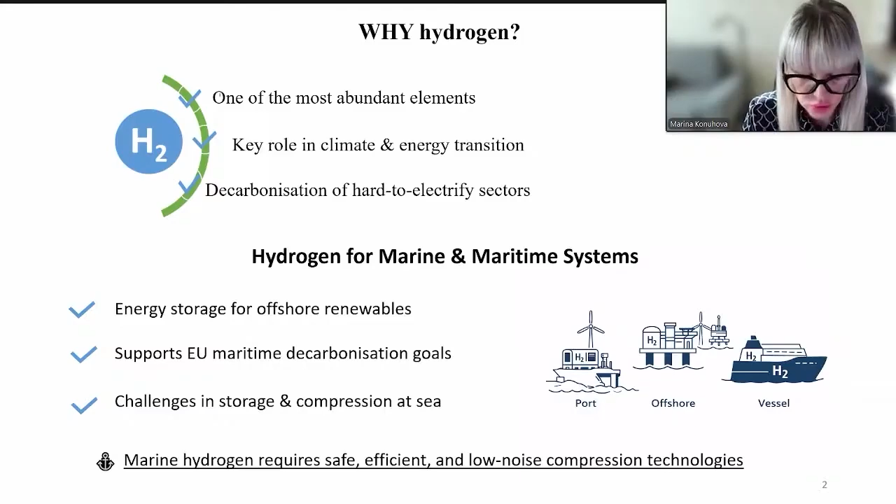On this picture, you can see a typical hydrogen compression infrastructure from production to high pressure storage. Hydrogen can either be delivered to the site or produced locally using electrolysis, often powered by renewable energy sources such as wind or solar. In this case, we usually refer to green hydrogen, which does not produce CO2 during production.

After production, hydrogen needs to be compressed from low or medium pressures to the high pressure levels required for storage and distribution. This compression stage is a key part of the overall infrastructure. In marine and maritime systems, the same concept applies, but additional requirements appear: equipment needs to be compact, reliable, and suitable for offshore conditions.

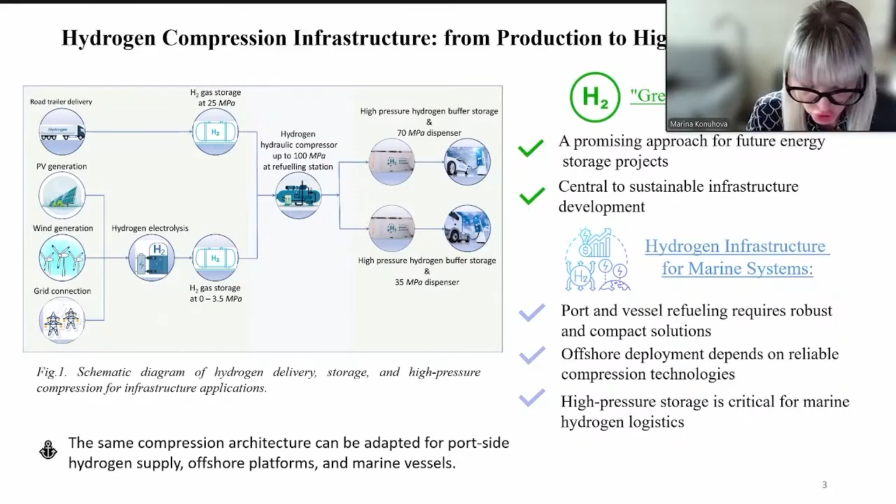This slide shows the concept of a hydraulic hydrogen compression system based on the liquid piston principle. This compression concept has been developed by our research group at Ventspils University of Applied Sciences and is protected by several national and European patents. In this system, hydrogen is compressed in several stages using a hydraulic working fluid. In our case, it is silicone oil, which acts as a liquid piston.

The use of liquid piston allows smooth and well-controlled compression. The system includes primary and secondary compression stages, high pressure storage, and a set of valves that control both gas and fluid flow. One of the main advantages of this approach is a relatively small number of moving parts, as well as low noise levels and improved thermal management.

In general, this system can reach pressures of up to 100 megapascals, making it suitable for port infrastructure and offshore platforms.

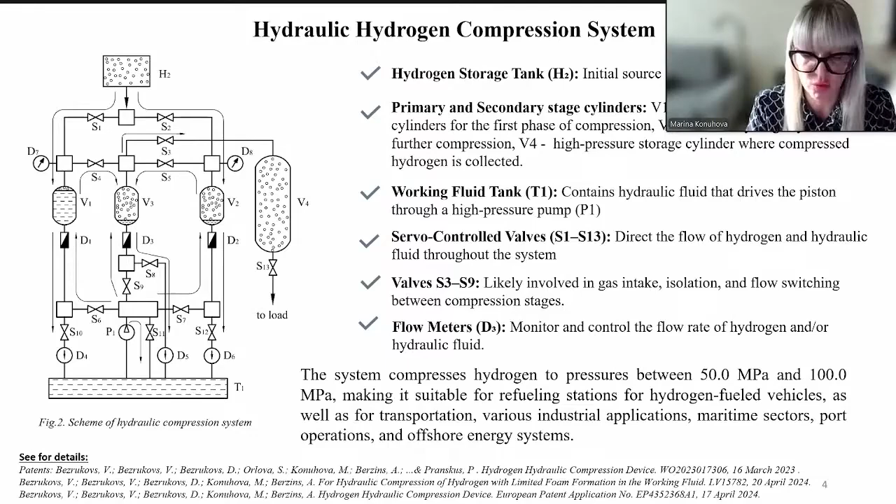This slide summarizes conventional mechanical hydrogen compression technologies such as reciprocating piston, linear, and diaphragm compressors. All these technologies are well established and widely used in stationary and automotive applications. They can achieve high compression pressures and have proven performance.

However, when we move to marine and offshore environments, some of their limitations become more pronounced. Mechanical compressors typically involve many moving parts, which leads to higher maintenance requirements as well as increased vibration and noise. As a result, conventional mechanical compressors are not always the optimal solution for marine hydrogen infrastructure. This motivates the search for alternative compression concepts that can offer a simpler design.

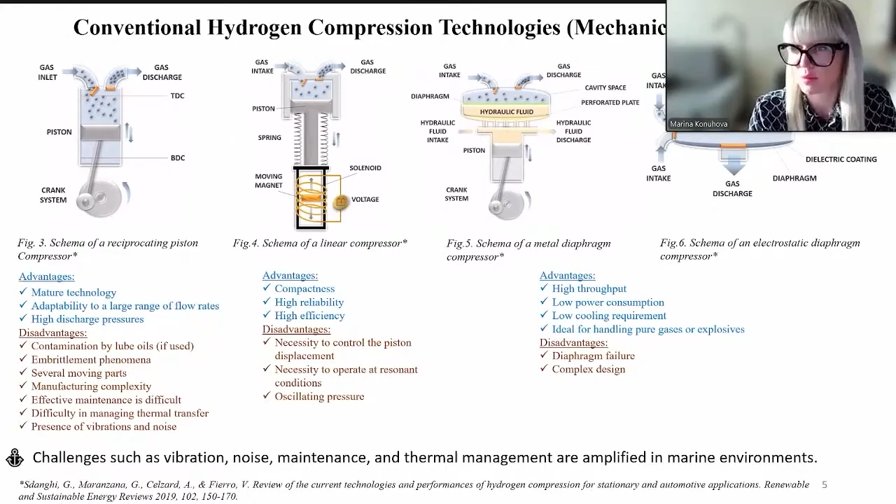Here you can see the alternative solution. In this liquid piston approach, hydrogen is compressed by a liquid column that acts as a piston inside a fixed volume chamber. This allows the compression process to be smooth and well controlled, while avoiding many of the mechanical issues found in conventional compressors. An important feature of the liquid piston is its thermal behavior.

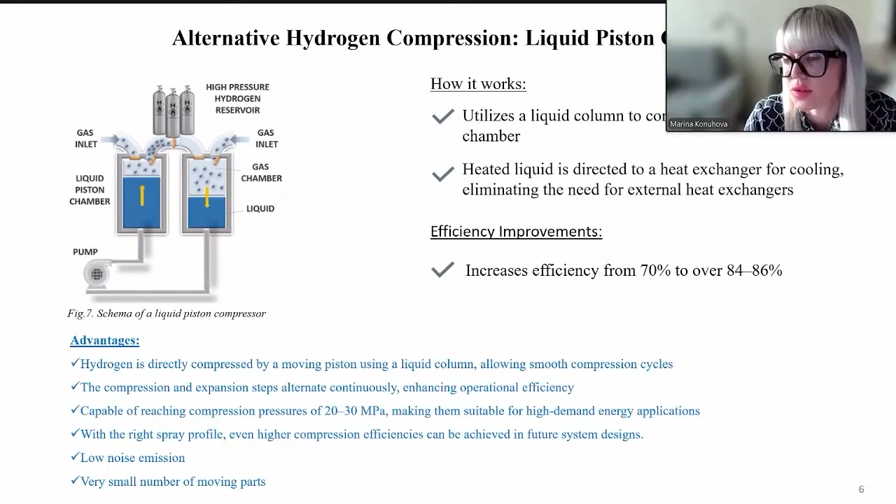The liquid absorbs heat generated during the compression and can be cooled more effectively. As a result, the overall compression efficiency can increase from a typical value of 70% to over 85%.

To better understand how hydrogen behaves during the compression process, we use a numerical model. This allows us to study how pressure and temperature change during compression and to design a safer and more efficient system. One of the main advantages of simulation is that different operating conditions can be tested without physical experiments. We can change compression speed, the geometry of the chamber, or the working fluid, which saves time and cost and helps improve system performance.

Here you can see the model. It has a height of 145 millimeters and a diameter of 100 millimeters, with a total volume of a little more than 1 liter. Hydrogen is located in the upper part of the chamber, while oil acts as the working fluid below. As the oil rises, the hydrogen is compressed.

The simulation includes heat transfer between the hydrogen, the oil, the chamber walls, and the surrounding environment. This multiphysics approach allows us to analyze temperature variation, heat losses, and pressure development during the compression cycle.

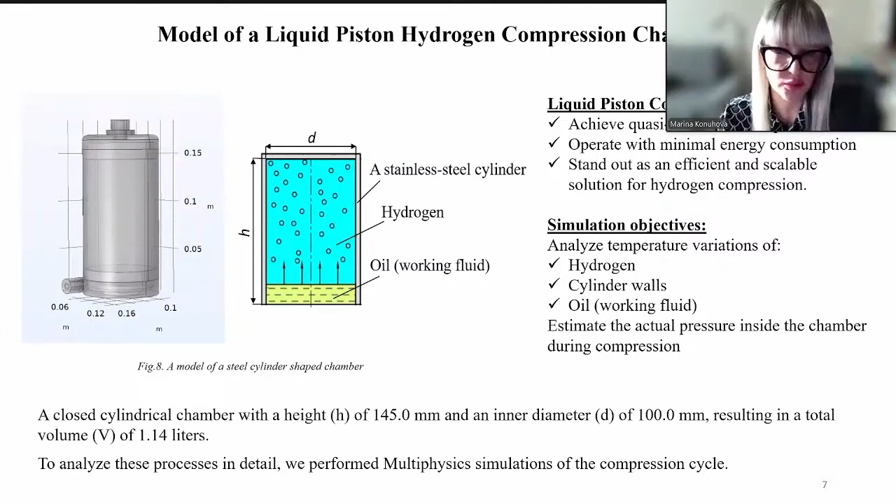Here you can see the liquid piston compression chamber implemented in COMSOL software. We used a multiphysics approach that combines compressible gas flow for hydrogen, incompressible flow for the liquid piston, and steady heat transfer. The model includes all main parts of the system: the hydrogen region, the liquid piston, and the steel chamber walls. During compression, the gas and liquid are compressed together, and heat transfer between the hydrogen working fluid and the chamber is taken into account. This allows us to analyze how pressure and temperature change during the compression cycle.

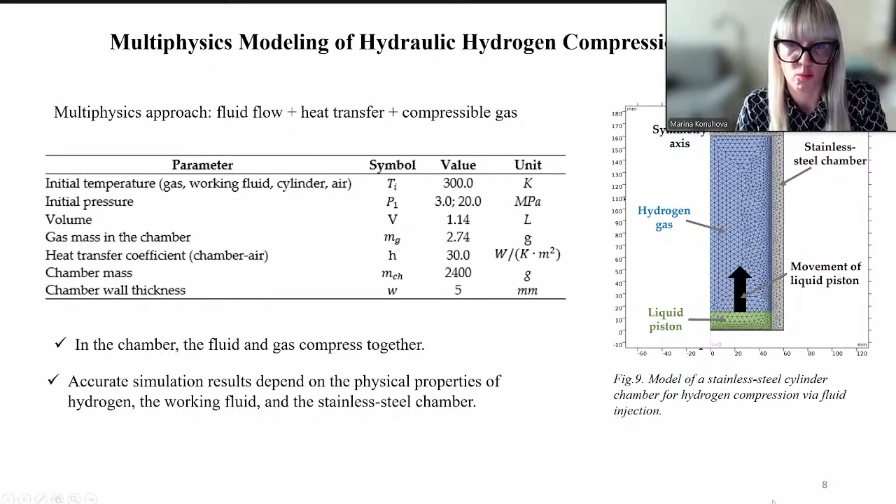In COMSOL, implementation begins with model parameterization. All key parameters are defined in the global definitions section. This includes key geometric values such as piston stroke, cross-section area, and compression chamber height, as well as initial conditions. Defining these values as global parameters means the same values are used consistently throughout the model in geometry, physical interfaces, and study settings.

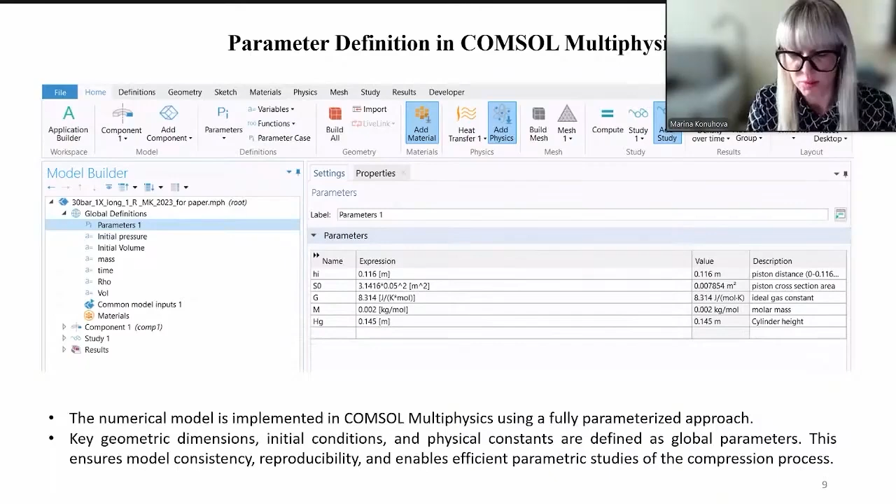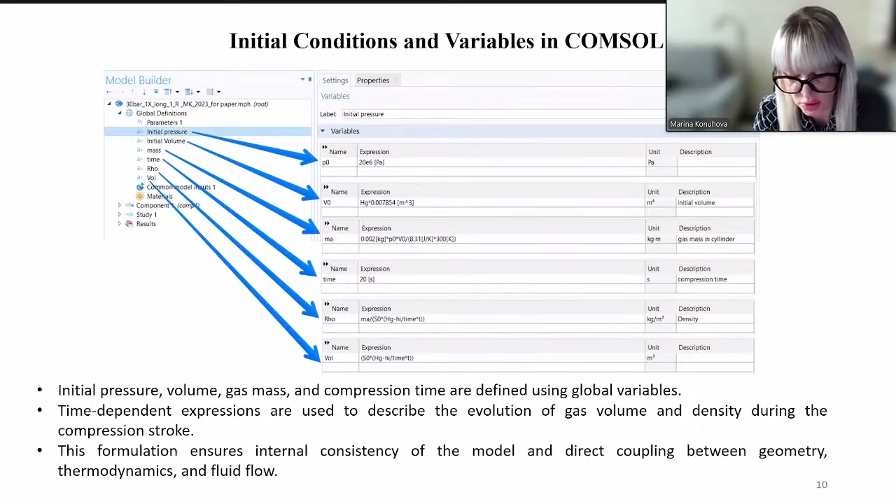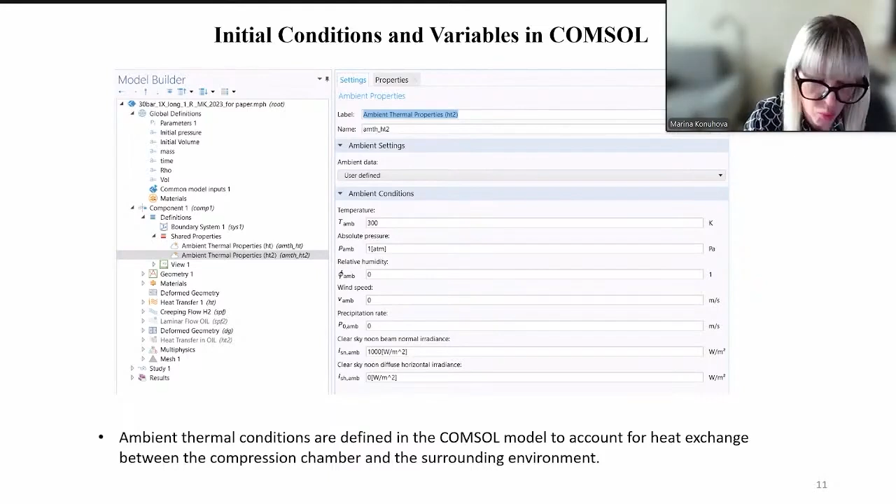In the next step, we determine environmental conditions, such as temperature and pressure. This allows us to account for heat exchange between the chamber walls and the surrounding environment, so the model can include realistic heat losses, which is important when analyzing temperature change during a hydrogen compression process.

Besides building the model directly in COMSOL software, the geometry can also be imported, for example, from SolidWorks.

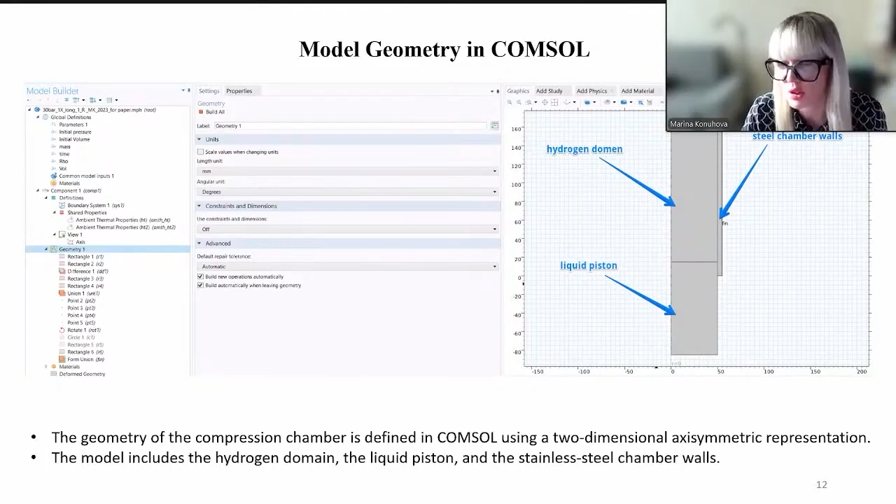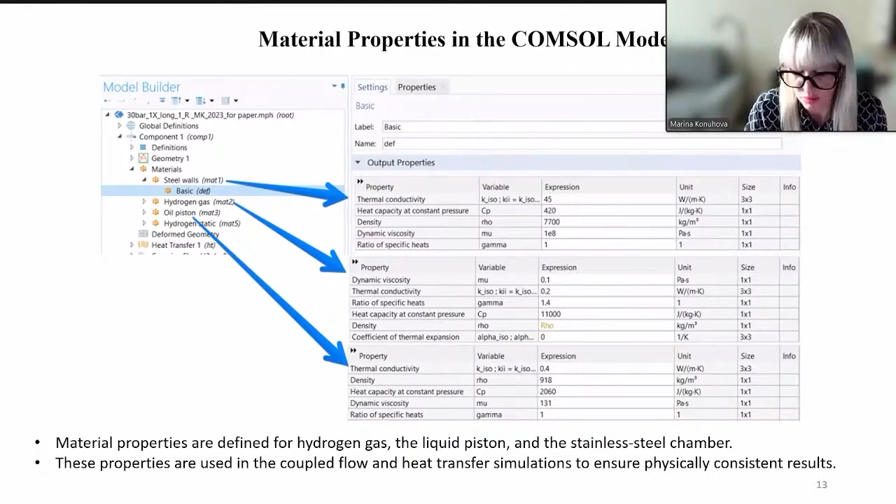You can use materials already available in COMSOL software, or it's also possible to enter them manually.

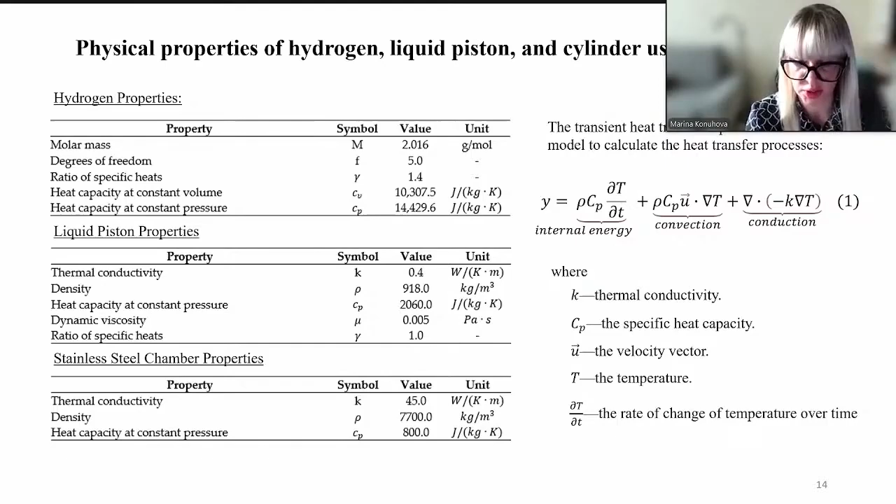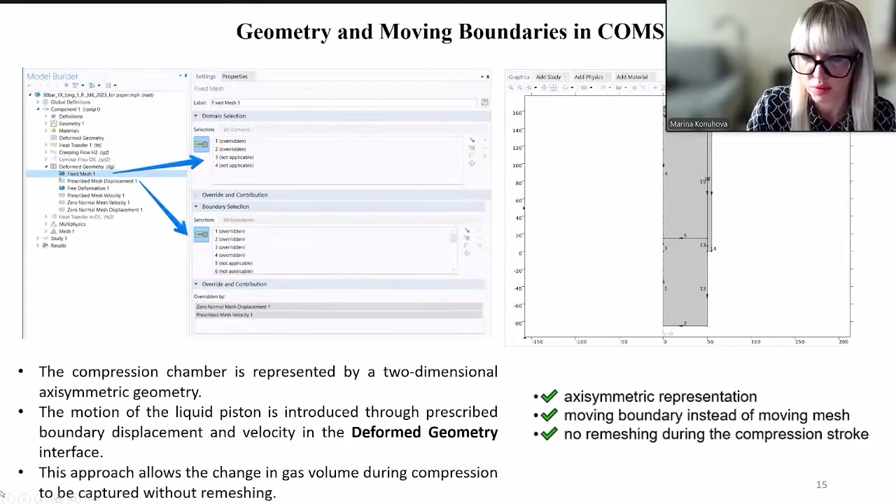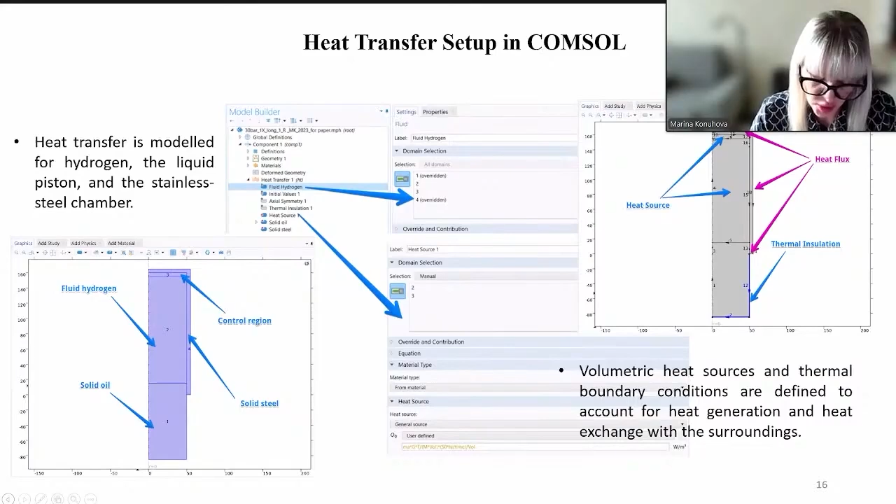This slide shows how heat transfer is considered in the COMSOL model. For all major parts of the system - hydrogen gas, liquid piston, and chamber walls - during compression, heat is generated in the gas and partially absorbed by the liquid piston. In the model, volumetric heat sources are defined within the gas regions, and appropriate thermal boundary conditions are applied to the chamber walls. This allows for the description of both heat generation within the system and heat loss to the environment. With this setup, COMSOL solves the coupled problem of fluid flow and heat transfer.

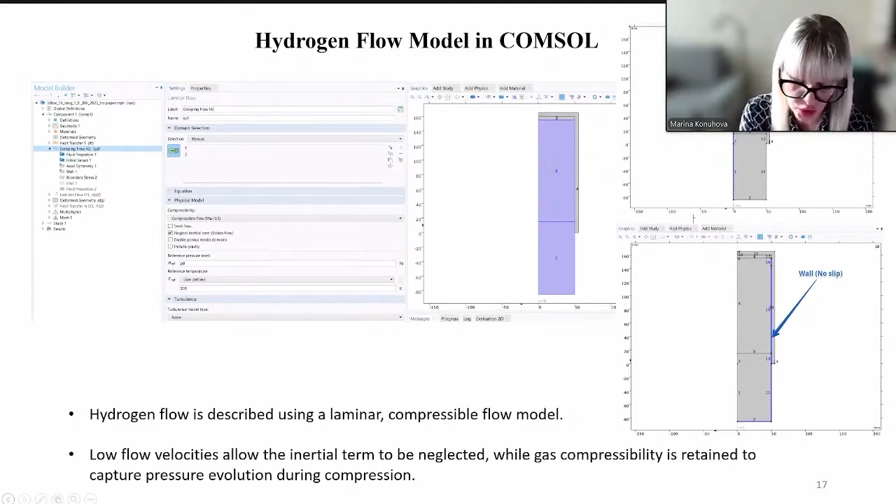In COMSOL, hydrogen is described as a creeping and compressible flow. Due to these low velocities, inertial effects can be neglected without loss of accuracy. At the same time, the compressibility of the gas is fully preserved, since pressure changes during compression are the key physical effects we want to account for. The axisymmetric formulation further simplifies the problem while maintaining the correct flow physics. Taken together, this approach provides a stable and physically consistent description of hydrogen behavior during the compression stroke.

The motion of a liquid piston is implemented in the COMSOL model in the following way. The liquid piston is not modeled as a mechanical component, but this component moving inside is driven through a moving boundary at a specific velocity. This boundary represents the interface between the liquid and gas and moves upward during compression, and as a result the gas volume continuously decreases, making the compression process controllable and physically consistent.

A significant advantage of this approach is its numerical stability. Since the mesh itself does not move or deform significantly, remeshing is not required during the compression cycle.

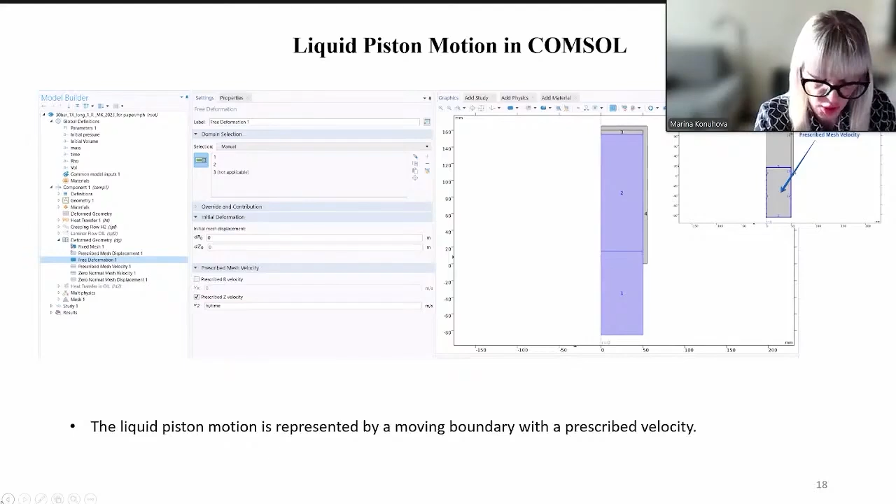Here you can see the mesh in COMSOL. The finite element mesh is generated for the entire computational domain, including the hydrogen region, the liquid piston, and the chamber walls. To ensure sufficient accuracy, the mesh is locally refined near the solid-fluid interface, as this is where strong velocity and temperature gradients are expected.

Specifically, boundary layer elements are applied along all chamber walls and in the region of the moving liquid piston. This mesh design allows for correct consideration of both flow and heat transfer effects without excessively increasing the overall number of elements, and as a result this achieves a good balance between numerical accuracy and computational efficiency for simulating transient compression.

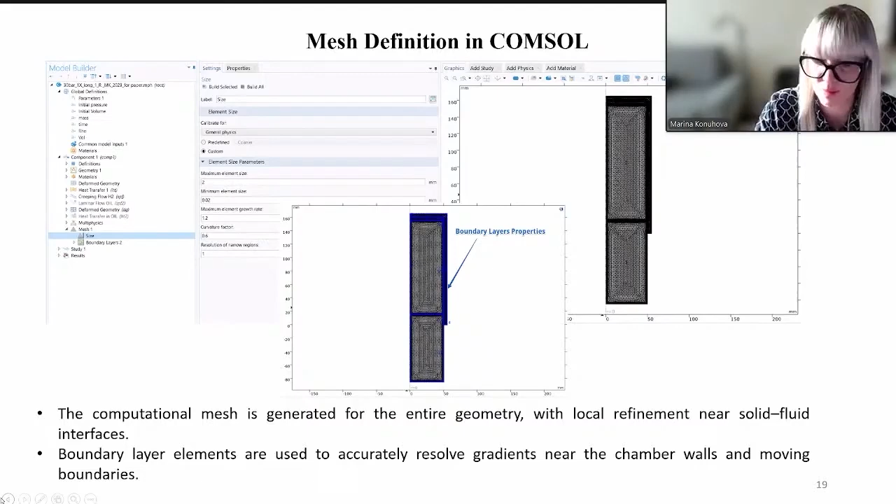The model uses a triangular finite element mesh. In the hydrogen region, the mesh is relatively coarse, as the flow is smooth and velocities are low. But at the same time, the mesh is locally refined near the interfaces between the hydrogen, the liquid piston, and the steel walls.

These regions are crucial for resolving heat transfer and boundary effects, so boundary layer elements are used there. As the liquid piston moves upward, the hydrogen volume decreases step by step. The mesh smoothly deforms with this movement, following the change in gas volume without restructuring.

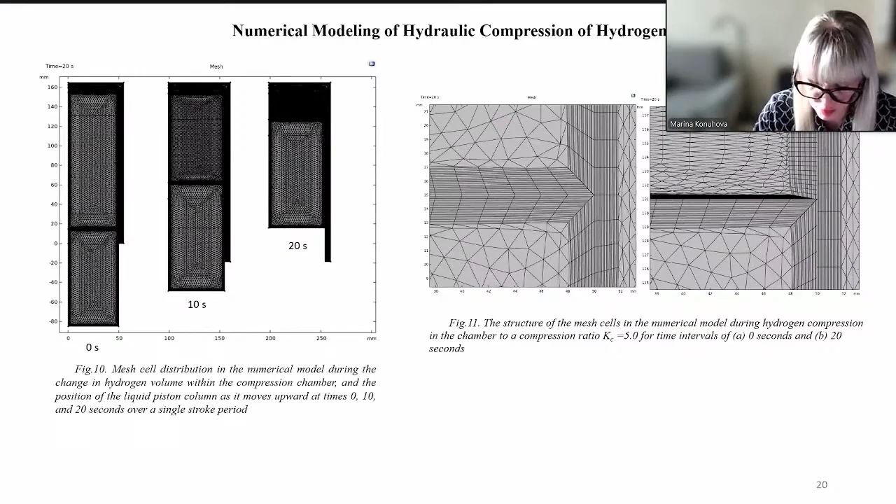In total, the mesh contains approximately 21,000 elements, providing a good compromise between numerical accuracy and computational cost for unsteady state simulation.

We used the time-dependent study. The simulation time corresponds to the specified compression duration, and in our model the longest compression was 20 seconds, and the fastest 0.5 seconds. All physical processes are solved in a fully coupled way.

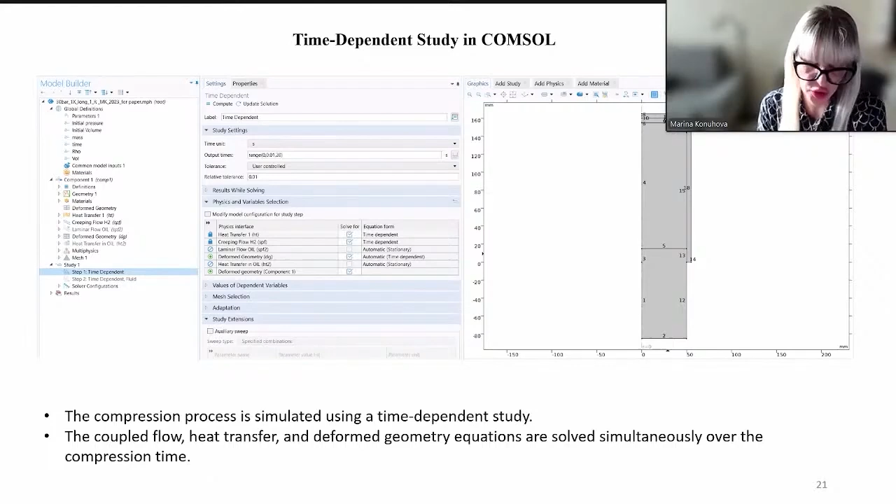This includes the flow of compressed hydrogen, the movement of the liquid piston through the deformed geometry, and heat transfer in gas, liquid, and chamber walls. This model allows us to track continuous change in pressure and temperature during the compression process.

After running the model, we obtain results and can review and analyze obtained data at each calculation step. The average temperature is calculated separately for each region: the hydrogen gas, the liquid piston, and the steel walls of the chamber. This allows us to clearly separate the thermal behavior.

By examining average values rather than local peaks, we can trace general heating trends during the compression process. This analysis is particularly useful for understanding the role of the liquid piston as a thermal buffer and for assessing the efficiency of heat transfer to the chamber walls. This information is also important for optimizing the compression rate and geometry of the chamber.

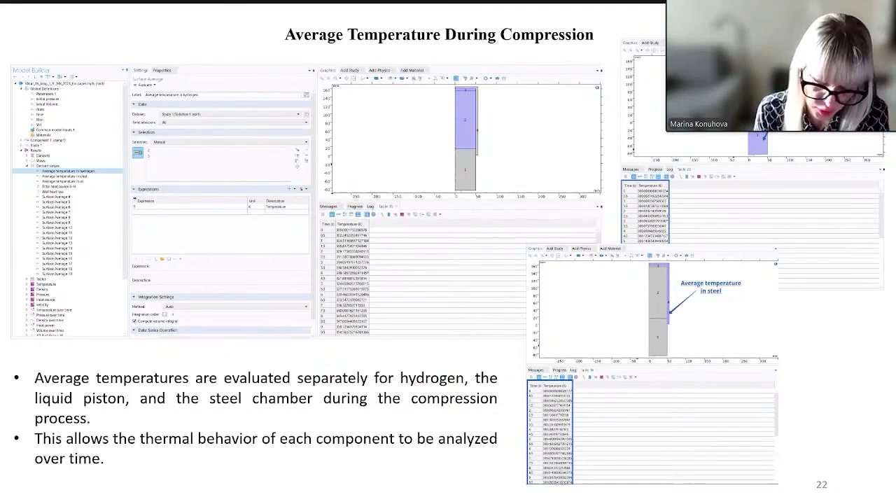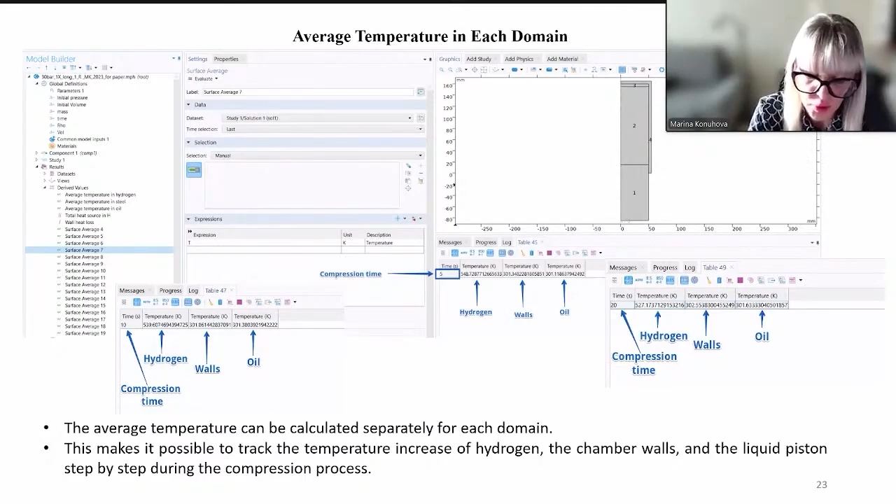Once the calculations are completed, we can calculate the average temperature in each domain. You can see the temperature, for example, at 5, 10, and 20 seconds. We can also see the average temperature results for any time period.

During the early stages of compression, the temperature increase is primarily concentrated in the hydrogen region as the gas is compressed by the liquid piston. As the process continues, heat is gradually transferred to the liquid piston and then to the steel walls of the chamber, and this becomes more notable after 10 and 20 seconds.

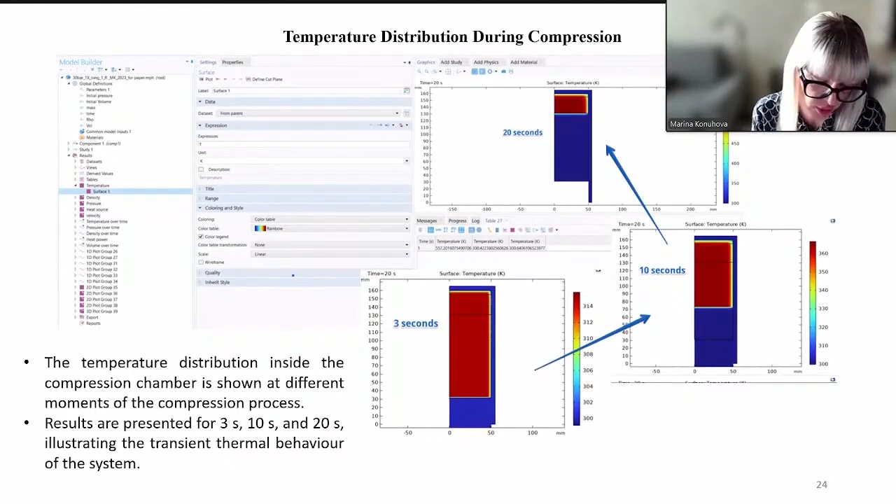These graphs clearly illustrate the transient thermal behavior of the system and show how the liquid piston and chamber walls contribute to the redistribution and removal of heat during the compression.

Thus, the process occurring during a single compression stroke was simulated using the presented model, with compression stroke time varying from 0.5 to 20 seconds. The initial hydrogen and oil temperatures were set at 300 Kelvin, and the compression ratio was equal to 5.

The calculation results for two scenarios are shown here: one with an initial gas pressure of 3 megapascals, and another with 20 megapascals.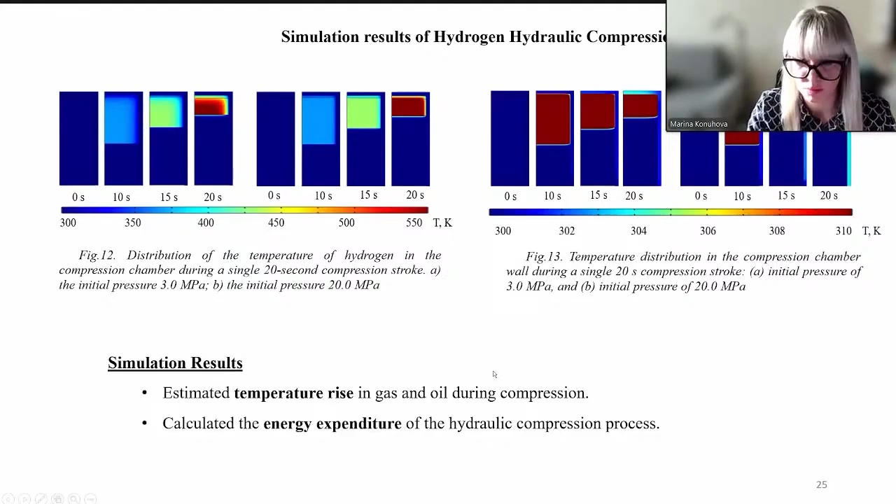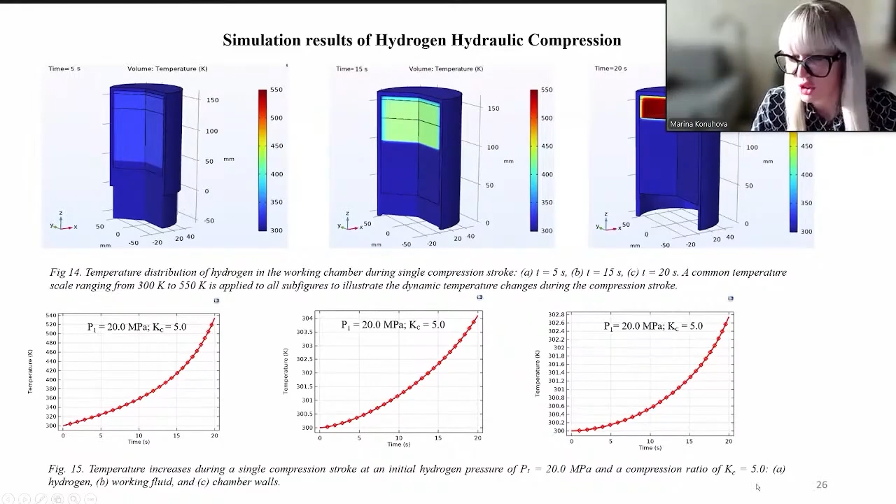Figure 15 shows the temperature change over time during a single compression stroke for hydrogen working fluid and chamber walls at initial pressure of 20 megapascals and compression ratio 5.

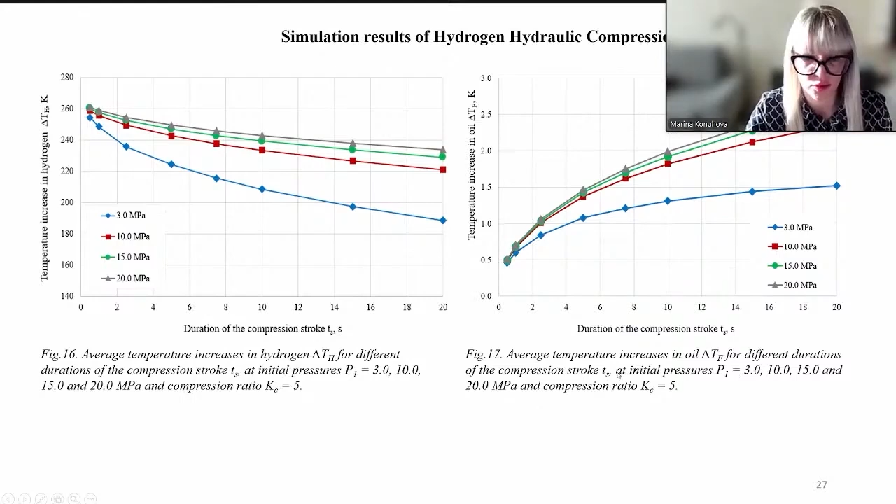The results of the compression process simulation allow us to estimate the temperature increase of the gas and the working fluid, in our case liquid oil, and therefore determine the energy expended during the compression process. On these figures, you can see how the average hydrogen temperature and oil temperature changed during one compression stroke, depending on the initial pressure in cases of 20, 15, 10, and 3 megapascals.

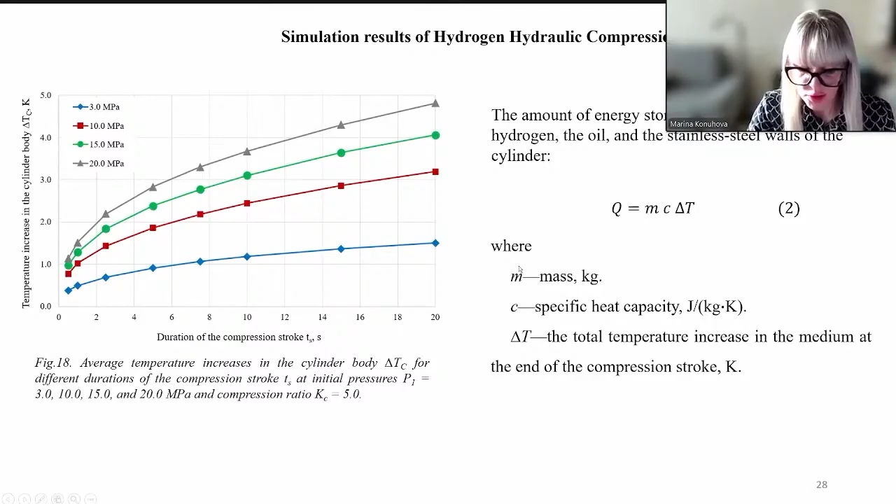Here you can see the temperature increase predetermined in the model corresponds to the energy expended in the hydraulic compression process of hydrogen, stored in the hydrogen, oil, and cylinder body walls. The amount of energy stored in the compressed hydrogen, oil, and steel is determined using an equation based on the laws of thermodynamics.

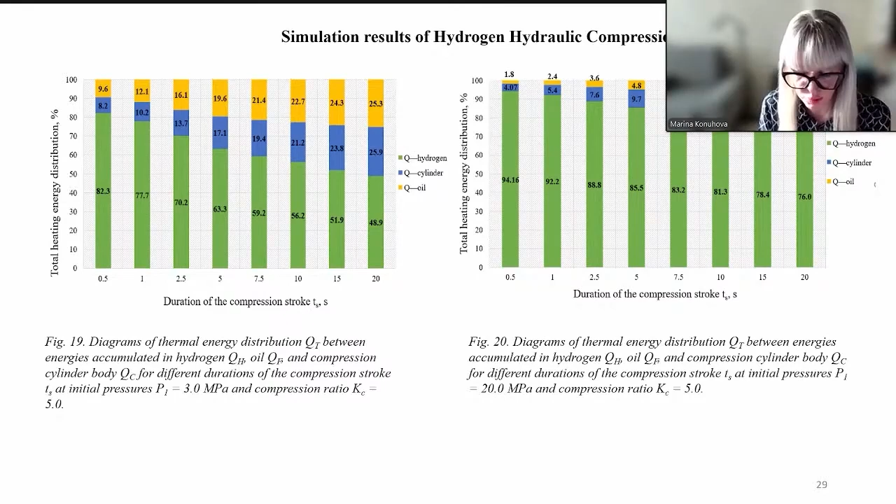Here you can see energy distribution at initial pressure of 3 and 20 megapascals. This diagram shows that most of the energy is concentrated in hydrogen during the compression. But of course, under real conditions, hydrogen and oil mix and exchange heat. When mixed, the gas cools and the oil heats up, resulting in a more balanced overall temperature regime within the chamber.

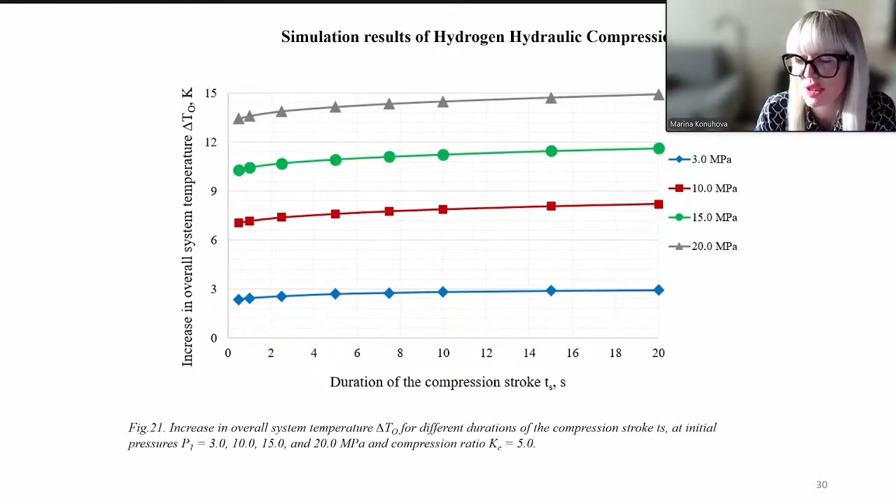This slide shows temperature change for varying compression stroke duration at initial pressures of 3, 10, 15, and 20. The next slide shows the relationship between the power required for compression and the duration of the compression stroke for 4 different initial pressures.

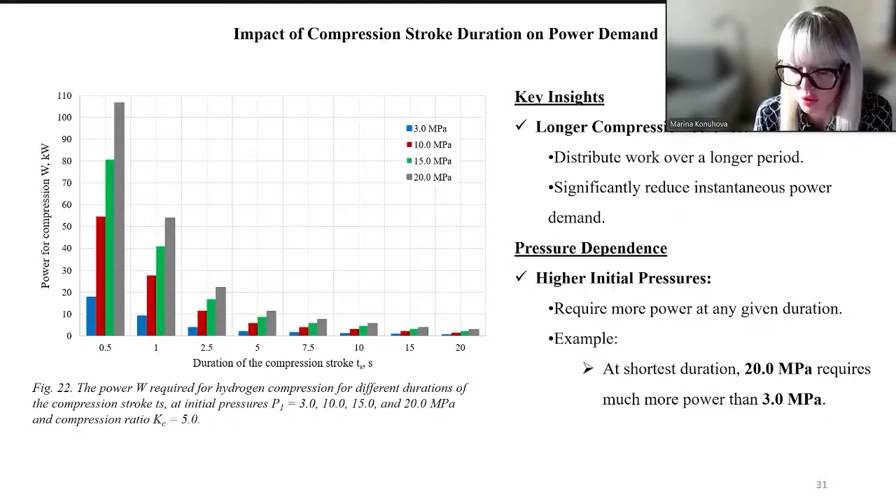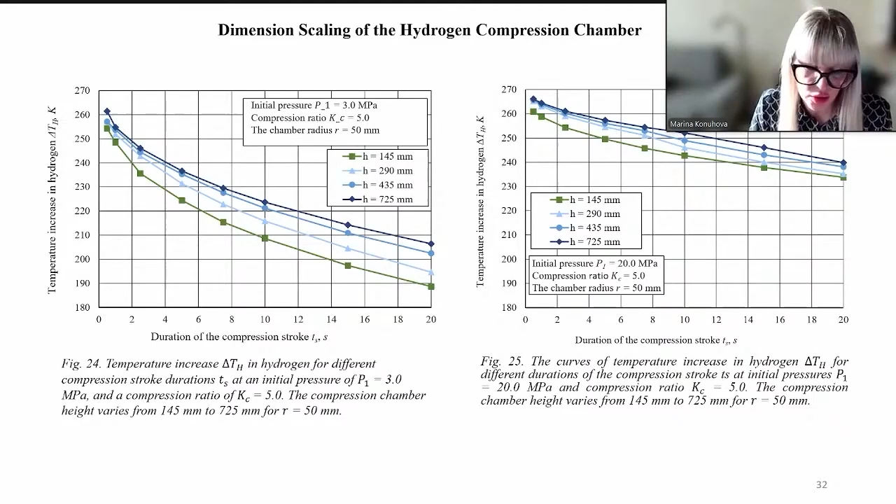Results. Figure 24 shows the increase in hydrogen temperature at different compression chamber heights. We have changed the height of the chamber. The results here really illustrate how chamber geometry and compression duration affect the thermal behavior of hydrogen during the compression.

On these figures, you can see that the chamber size has a significant effect on temperature change at low volume, but it eventually stabilizes. These trends suggest that while large chamber volumes contribute to greater heat release, their effect diminishes at higher volumes, indicating an upper temperature limit beyond which increasing volume has little effect on temperature increase.

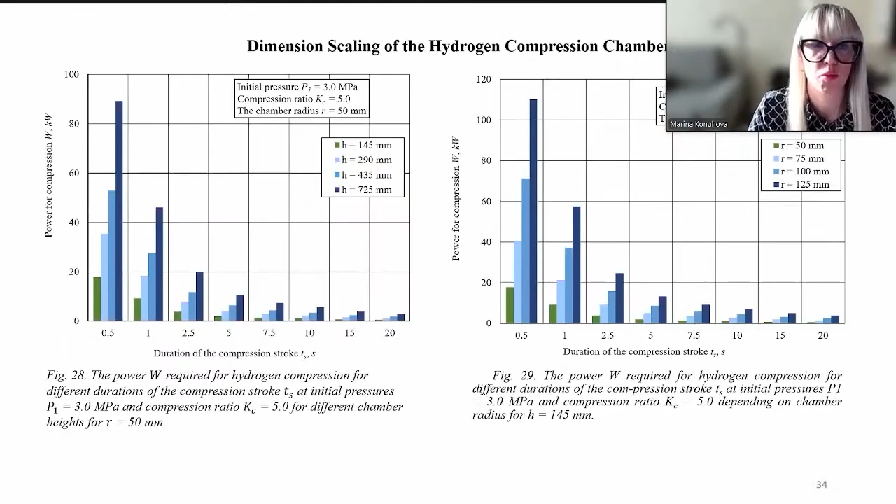I will skip this for now, since it leads into the conclusion.

In conclusion, it should be noted that numerical results demonstrate that liquid piston compression provides effective thermal management during the hydrogen compression process, and chamber geometry significantly influences both temperature and energy consumption, making optimization necessary. Due to their compact design and favorable thermal characteristics, liquid piston hydrogen compressors are well suited for use in the marine and offshore hydrogen industry.

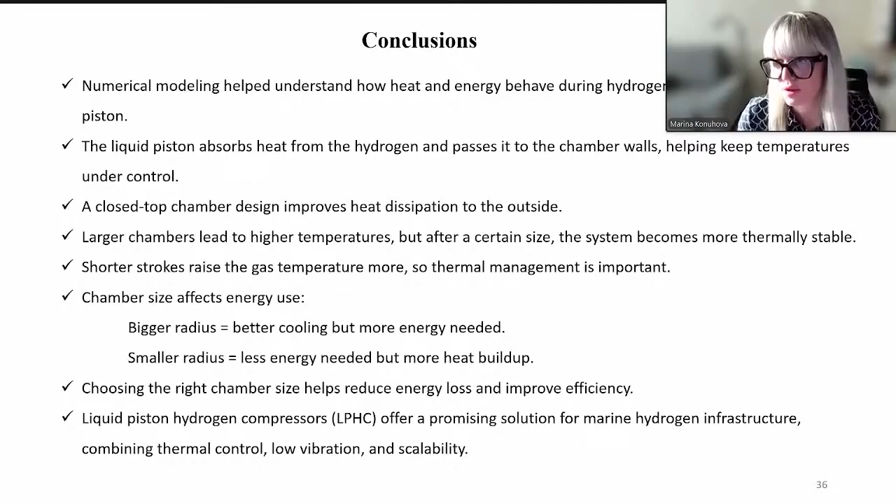Any questions, comments? Yes, we have a question from Norman Jacobson. Norman, can you come, please? Down.

Excuse me, did I get this correct? Your compression cycle is about 20 seconds, is it like that? We can change it, we can start from 0.5 up to 20. Yes, but in this result you saw how this compression time depends on pressure. Half a second is faster and 20 is slower.

I'm just wondering, what is the height, how long is your cylinder? 145 millimeters, it's very small, 1 liter. So this velocity is well below 1 meter per second in any case, on average.

So, my question is, you are using boundary finite elements. Boundary finite elements are usually used for boundary layers, to reveal boundary layers, as the physicist Prandtl introduced them in the previous century, beginning of the previous century. Do you think this is really needed in the case when your velocities are so low? Because this can be avoided.